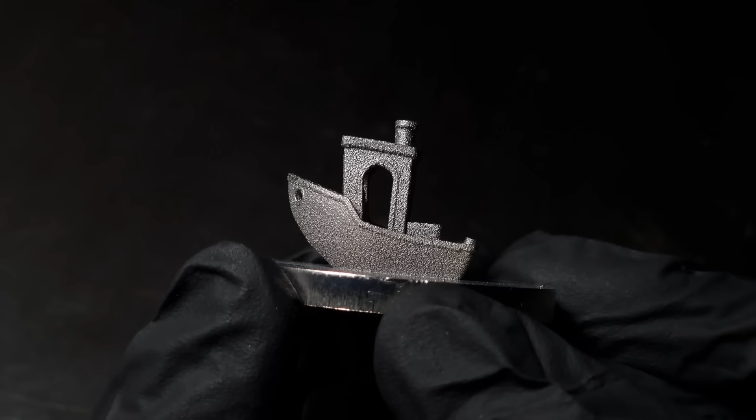Alright, in today's video I'm going to show you how I managed to print this benchy from stainless steel. I'm also going to show you how you can make your own welding camera and what parts are required. I'm going to explain how this contraption works. And finally, I'm going to explain where I've been for the last nearly 2 years.

Those of you who have been around long enough to know what this thing is may remember that I'd given up on laser powder bed fusion as a desktop metal 3D printer. And while it had yielded something, really it had fallen short. So over the next 12 months, I took another swing at things, and well, here's what became of it.

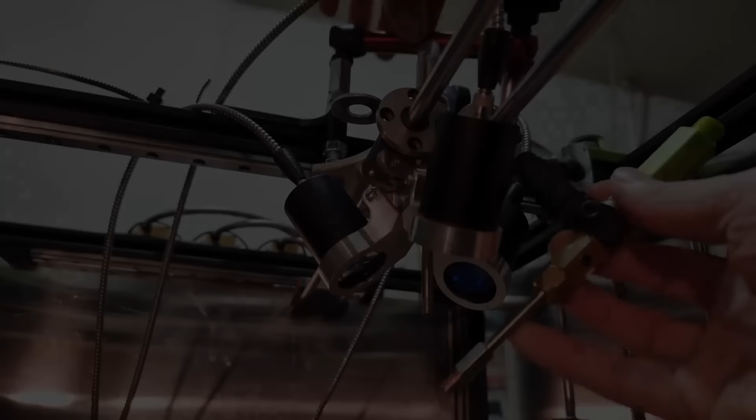So, I think to better understand the direction things took after the last video, we need to recognise the problem I was trying to solve. Without being able to feed the wire into the weld pool unimpeded by reflections, there was no chance of this succeeding. This was something the previous design struggled with, and as a result I spent many hours terminating fibres and untangling wires. On top of this, the beams didn't align nicely, the gas flow was unbalanced, and without being able to see the weld pool there wasn't much chance of a control loop. So I hit the drawing board.

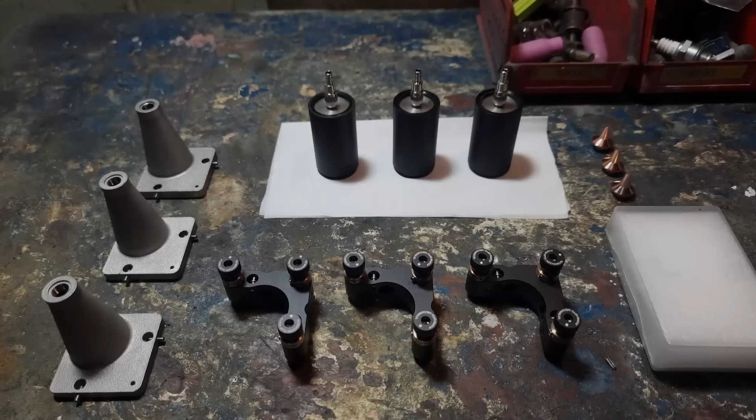The next iteration of design would play on the last, letting each beam bounce off the positive displacement created by the weld pool. To ensure that the beams were symmetric this time around, I repurposed 3 optical mounts, mating each of them to a lens host, which would also serve to direct the flow of gas. The hosts themselves were 3D printed from stainless steel, courtesy of JLC 3DP. Unfortunately, they don't offer aluminium as part of their printing service, and the geometry was a little too awkward for milling.

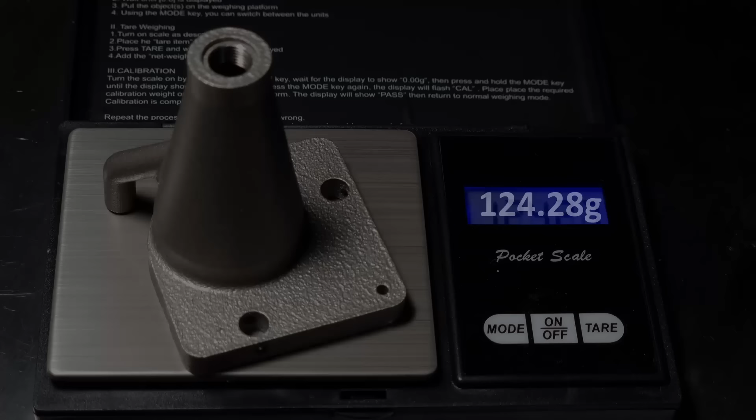Other than the threads needing to be tidied up, the dimensions were good and the surface finish was acceptable. Interestingly, JLC 3DP quoted the density of their 316 stainless steel as 7.8 grams per cubic centimetre, making one of the parts 100% dense and another 103% dense. I'll leave you to infer what's going on there.

The second major aspect of this design was to integrate closed-loop feedback. If I could achieve this, I would have a much better chance of avoiding the effects of stress and the potential need for simulation software. The only method I really deemed worthwhile was to exploit visual feedback, making an inference about the accumulation of heat based on the level of incandescent light and the size of the weld pool. With this information, I could map and dynamically adjust the energy input in real time.

There was one problem, however: welding cameras are expensive. So I would need to make my own. Fortunately, in principle they are pretty simple. It really just comes down to balancing the background lighting with the foreground. Given this is a laser welding process, it doesn't generate nearly as much light as its electric counterpart, with the exception of the laser itself, which can be handled with a short pass filter.

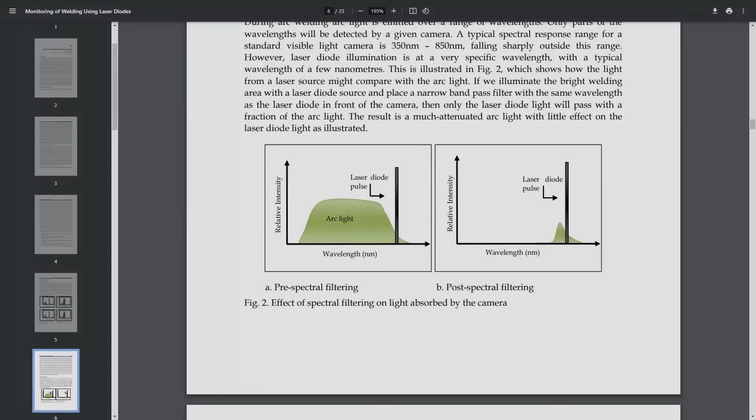Now I wish I could say that this was my plan from the beginning, but I went down a few roads before getting here. The first of which was informed by some older research which focused on the use of a narrowband filter alongside some pulsed laser diodes. This technique is better suited to electric arc processes as it emphasises broadband light rejection, but not knowing what else is possible, I still gave it a go.

My first attempt would be a swing and a miss, as I wanted to repurpose a smartphone. I had observed my old S9 doing pretty well in more demanding circumstances, so I was pretty confident I could achieve something. But I chose to sacrifice this S6 to begin with, just to see if the hardware would play ball. The overall plan was to remotely mount the camera and remove the battery, later upgrading the phone once I was more certain of things. Things would only go south from here as the phone kept boot looping, the camera was stuck at its maximum focal length, and then I would break the screen.

Meanwhile, I was working on building a pulse driver for a 50W 905nm diode. These are typically used in LiDAR applications, with some diodes reaching as high as 400 watts. Unfortunately, their wavelength was uncomfortably close to that of the lasers driving the welding process, making their performance very much dependent on the roll-off of the narrowband filters.

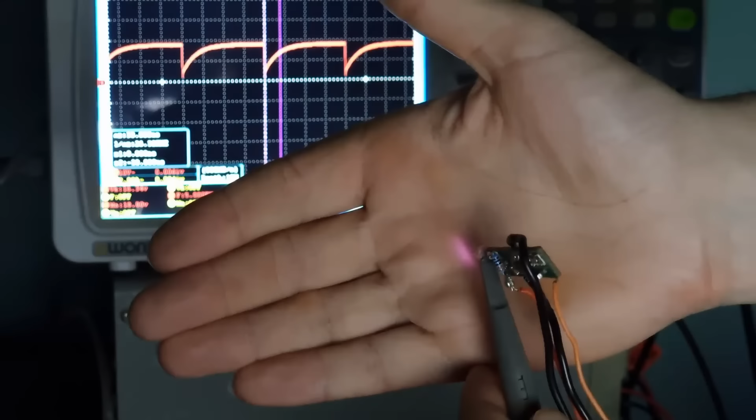Of course, the 2 narrowband filters I ordered arrived unmarked and had curiously similar performance, which didn't bode well as there should have been at least a 30% difference between the two. To make matters worse, I had ordered different diodes to those used in the research paper, and couldn't get anywhere near the fraction of power at 1 microsecond. Things were not going well.

About a month into this and having no camera or light source to show for it, I had to stop and reappraise things. For the sake of the camera, I opted to take a less intrusive approach, trading pixel density for practicality and making up for it where I could.

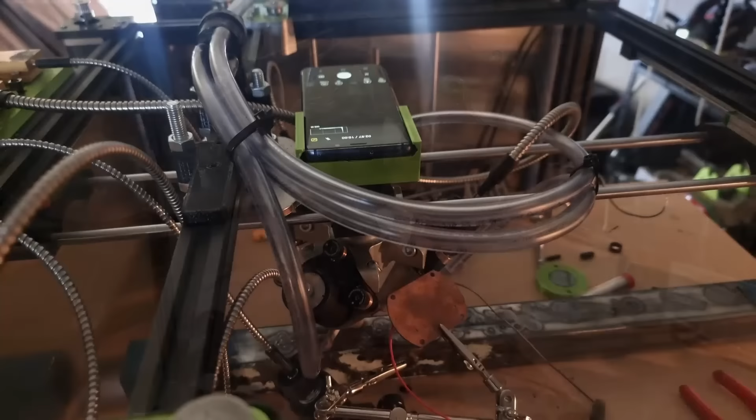I also toyed with a few ideas for a light source, the first of which involved adding another 915nm pump. But this was a bit expensive and didn't allow me to juxtapose the different wavelengths, and still left me with a monochromatic image. I also really wanted a colour image, as I knew this would make processing the stream a lot easier, so I kept experimenting.

I particularly wanted to try and avoid using broadly spaced laser wavelengths, so this COB LED rated at 5K lumens had its moment. I would adapt the same pulse circuit from before to overdrive the LED, but nothing really became of it, the intensity was still too low. I think some form of reflective light guide might have stood a chance, but using a lens was a mistake as the light was too dispersed, and the whole thing locked me into a weird configuration.

In the end, I would concede and try using a simple 450nm 5W diode, and this is where things would finally come together. I would opt for a pulse scheme here as well, as the head needed to go on a diet, and adding a heatsink definitely wouldn't have helped.

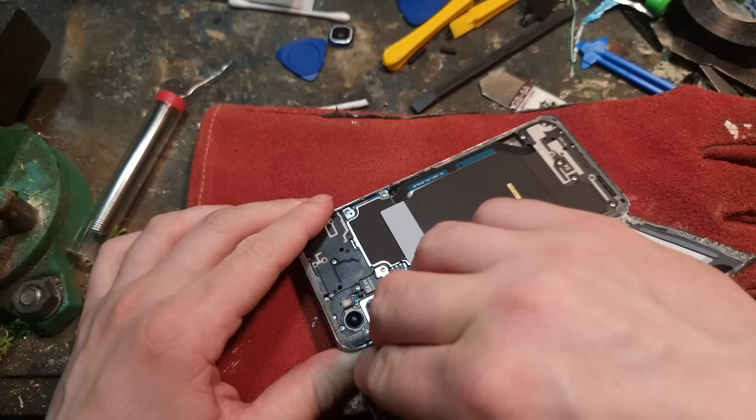So things would continue in this fashion for a while, with the phone eventually being upgraded to an S20. I really wanted to bring the camera in closer to help improve the resolution, but as the S20 came with various camera modules, I would end up with the wrong cables and just couldn't find what I needed. You can see the image had improved slightly, but it was still too grainy and prone to being blown out in the region of interest.

I just had to accept that without being able to mount the camera remotely, I wasn't going to get the image quality I wanted, and therefore would upgrade the camera to a standalone unit, this one claiming to have 78 decibels of dynamic range. Unfortunately, switching over to a standalone camera would call for a PC, adding anywhere between $500 to $1,000 based on second-hand components.

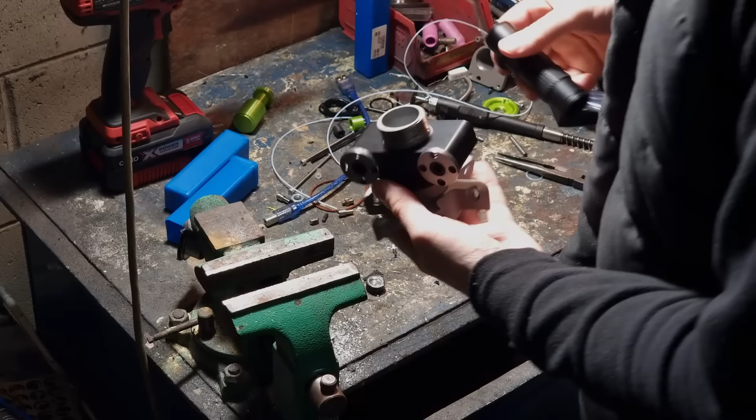Now that I had a new camera, this called for a new head, and now that I was paying for it, was made from aluminium. The camera was also paired with a 150x microscope, all very typical of PCB inspection hardware. I was also tired of having to manually synchronize the laser to the frame rate of the camera, and without wanting to add more bulk, decided to integrate a fiber.

This particular fiber is much too large at 600 micrometers, but being unsure of how tightly I could concentrate the beam, decided to play it safe. This would pretty much be the configuration I would run with for the remainder of my time working on this concept, with the beam switching between collimated and focused depending on what approach I was taking.

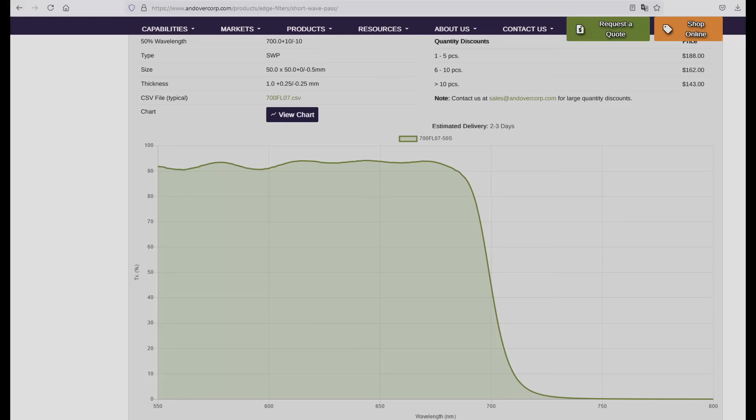To summarize, to build this welding camera you'll need a camera with a decent dynamic range and the ability to handle low light conditions. You'll also need neutral density filters in the order of 0.1 to 0.3%. I would recommend getting a few of a couple of orders of magnitude higher, just to allow for some adjustment. If you plan to record a laser welding process, then selecting a shortwave filter with a 3 decibel point at least 200 nanometers below the laser wavelength is ideal, more so if you want to factor out the laser completely.

For those more interested in recording an electric arc process, this particular camera seems to do okay without any light assistance. But for those wanting to replicate a more professional system, I've read that at least 200 to 300 watts of pulsed laser light is needed, synchronized to a camera with a global shutter, and outside of a peak within the emission spectra. I'll leave more information in the description.

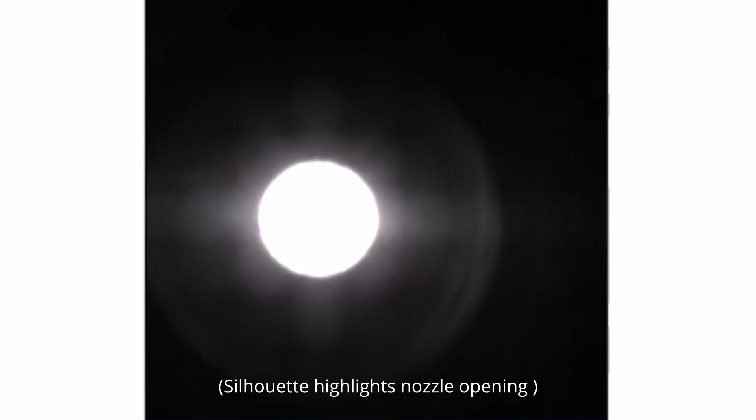Alright, so we need to rewind a little bit. To get the head set up, each collimator had to be adjusted to ensure each spot was focused as tightly as it could be. For this, I used a camera from Imaging Source along with their free software tool IC Measure, and when combined with a neutral density filter would allow me to see the image projected by the light source alongside the degree of light spill. You can see from a few of these images the imbalance in delivered light, and unfortunately the cause wasn't immediately apparent to me.

I'd assumed that at least one of the two lenses wasn't centered correctly, and despite repeatedly trying to realign the pair, would be forced to correct for it using whatever means I could. But later I would realise that the issue had nothing to do with the lenses and instead was caused by the SMA 905 adapter plates. Even though they are threaded, they often wouldn't sit flush despite appearing otherwise, owing to perhaps half a millimeter of play. So if you happen to notice scalpel blades hanging off this from time to time, yep.

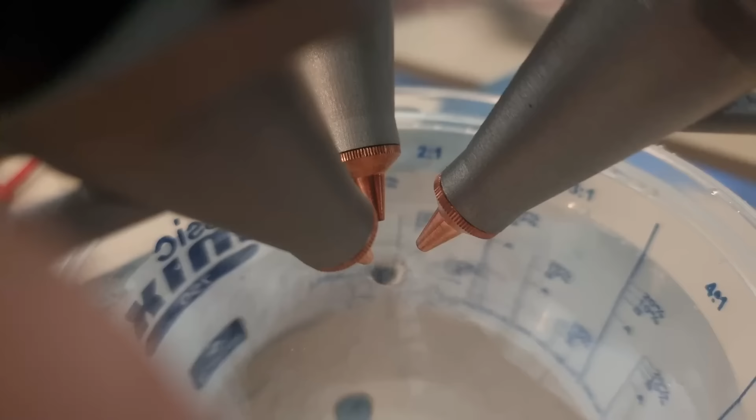With each lens housing aligned, they still needed to be aligned relative to each other, with each beam focused just outside their focal length and past the center point to cause the beams to deflect rather than reflect. Beyond the more mundane aspects of preparing the head for its initial runs, the first few tests really just sought to identify what was possible at a glance. With an overhead camera it seemed that this ruled out a coaxial feed, but I would try my hand at it anyway, using a J-type coupling.

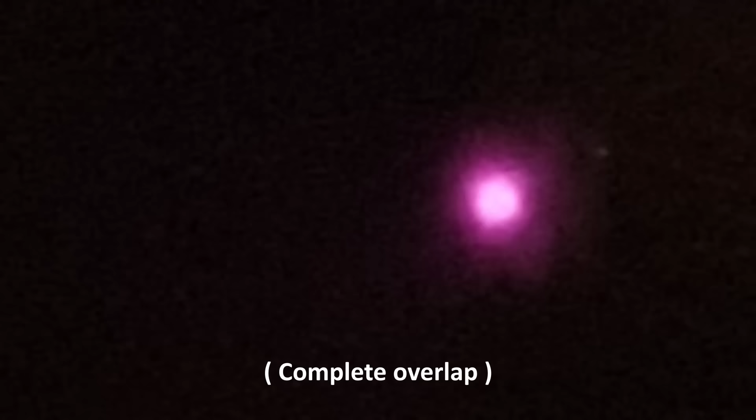I had reverted to using the smaller lasers from my previous attempt at this, as I really wanted to keep costs to a minimum. Unfortunately I found that I couldn't achieve much separation between the beams at this power level, and would have to resort to more familiar tactics. As a result, the results themselves were a mix, revealing that reflections were still very much a problem, setting the tone for the rest of my time working on this concept.

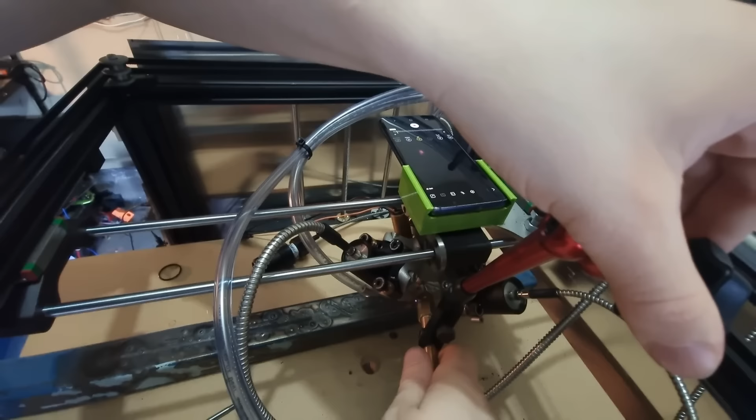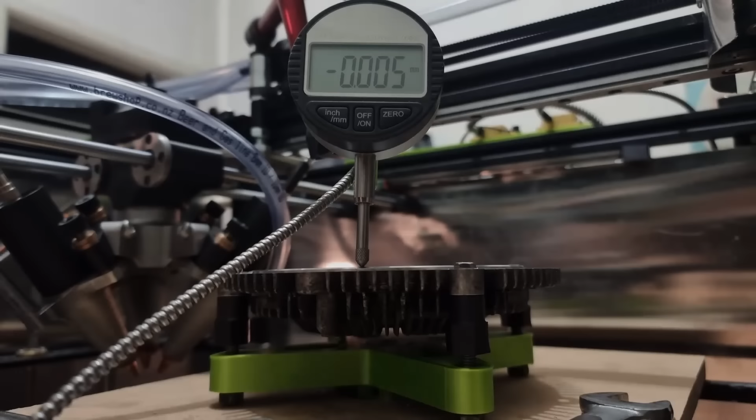As to what that plan entailed, it would simply be what had worked in the past, a two laser scheme which would see the wire being fed into the dead zone, but this time with the ability to maintain a consistent delivery. I had repurposed a viscous clutch taken from an Nissan TD27, with the substrates being cut to size and the plastic components acting as placeholders until the steel components arrived. If there was one thing that stood out to me, it was that leveling was going to be an ongoing nuisance, and heavily compounded by an unconstrained bed, but that just seemed par for the course.

Since I now had a rotating platform, I couldn't help but wonder what this process could achieve in an ideal scenario, that being an uninterrupted deposition relying on 2 lasers rather than 3. Now I did try 3 lasers momentarily, but without a coaxial feed that went about as expected. With 2 lasers however, the reflections were much easier to manage. After the obligatory printing of segments, checking that I could translate a Cartesian scale to a rotational one, I tried putting down a few rings to gain a better sense of the deposition height.

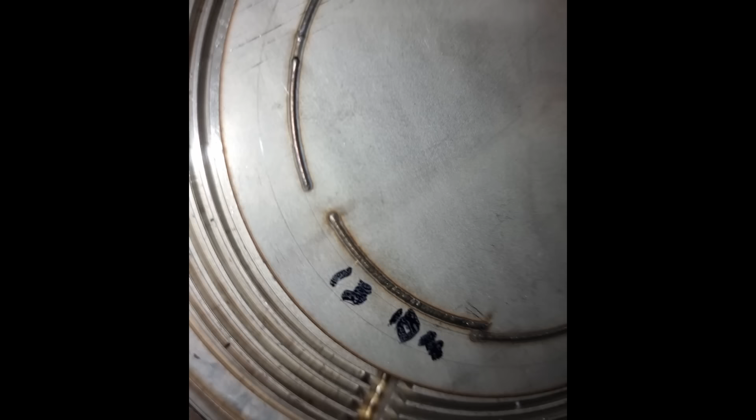The unfortunate thing about this design is that the layer height and respective track profile are influenced by the energy density, with the energy density itself being partially defined by the laser overlap and relative angle to the translation path, amongst other things. I would keep the beams partially overlapped to create a high point to aid beam deflection, and would also keep the wire fed at 45 degrees relative to the path of motion for the sake of simple geometric tests. But even so, this wasn't immune to reflections due to corners and other disruptions which would then build on themselves.

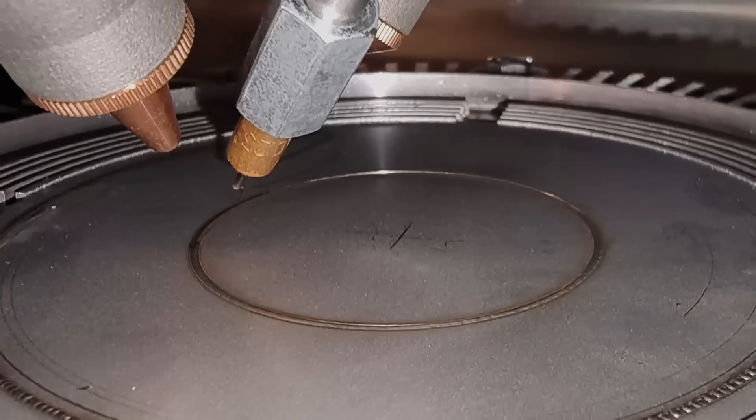Furthermore, if the platform wasn't exactly level, the degree of overlap would change and so too would the deposition height. But on average, with a level platform and a velocity of 10mm per second, a track width of 0.8mm and a wire feed rate of 22mm per second, this would yield a layer height of approximately 0.14mm. Naturally, what would follow would be several tests to see how the layers stacked up, and what you're looking at here is the result of 7 layers which should have amounted to nearly 1mm. Instead, the height was only 0.85mm and the source of it I wasn't too sure of.

It could have been that my layer height increments needed to change, or it could have been that the accumulation of heat was broadening the profile, creating a sagging effect. Either way, it wasn't good news. I was reluctant to start changing parameters at this point as I had already blown a couple of fibres, each time costing me a couple of days and several centimetres in fibre length.

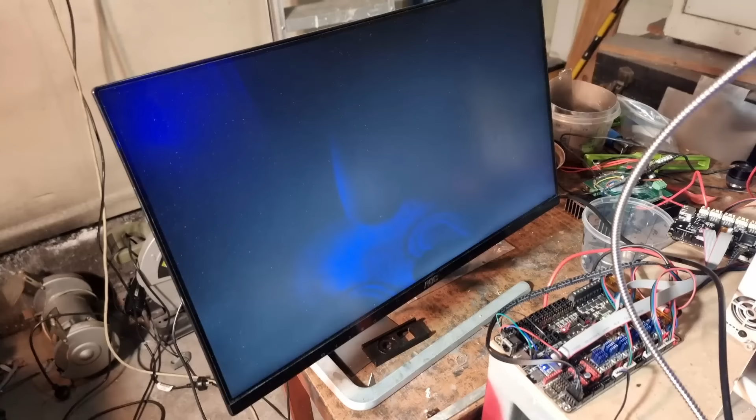So at this stage I started to focus on the camera to gain a clearer picture of what was happening. This is just an example, but you can see the effect of not having the layer height balanced with the feed rate, causing the focus to retract towards the beam waist. Although this example happened much later on, it's likely that the rings were subject to the same issue, but this was at least a month later and I'd begun to question the merit of a 4th axis, at least in this format.

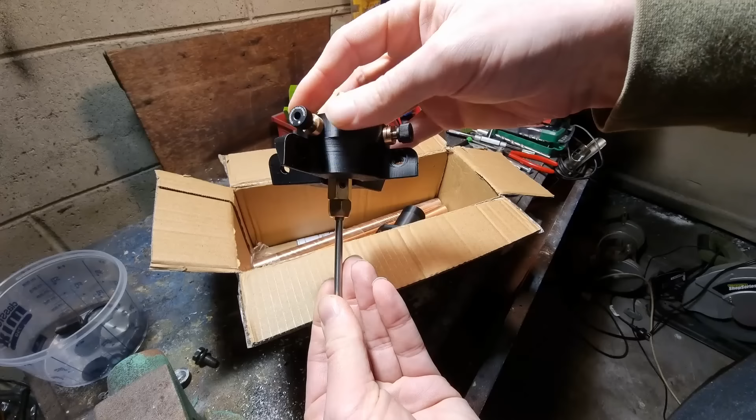I decided that I would try and simplify the design by reducing the laser count to 2, introducing a proper coaxial feed, and sacrificing the camera's overhead view if it enabled me to avoid complex path planning. This scheme would aim to keep the beams positioned 45 degrees away from the direction of motion, once again encouraging the reflections to bounce away based on a positive displacement. There were edge cases such as tight bends and 90-degree corners which had the potential to cause problems, but since I had now upgraded the lasers to 2 370-watt modules, I intended to control each module independently.

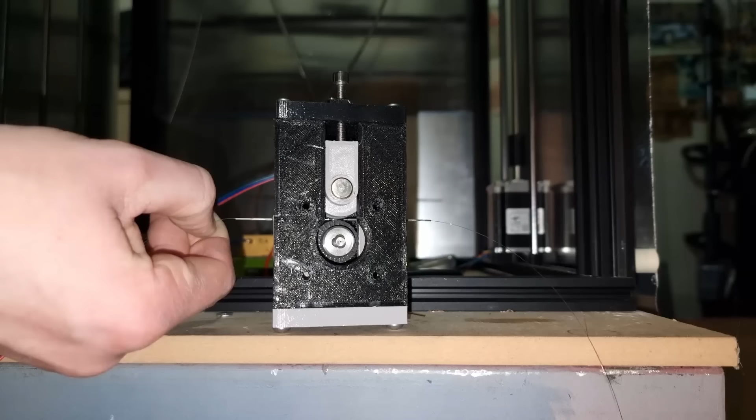The coaxial feed also made use of an XY stage as aligning the wire had proven to be exhausting, taking a disproportionate amount of time to get set up due to its delicate nature. Any slight bends upstream could also amount to a false alignment, leading to the wire missing its target and creating back pressure, creating a mess at the wire feeder. I wanted to solve this by reducing the distance between the outlet of the nozzle and the substrate.

Copper nozzles had worked okay so far as they reflect most light at 915 nanometers, but I couldn't find any with a fine enough bore and therefore would still have to sleeve them with syringes. Reflections would still see the feedstock bonding to the nozzle however, and to try and get around this I would use a fibre optic ferrule made from an inert material, in this case zirconia. Pure zirconia unfortunately undergoes a phase change at roughly 1200 degrees centigrade and is prone to cracking as a result.

I had to know if this would absorb or reflect laser light and to find out whether it could even handle the heat. The first thing I did was to expose it to the flame of a propane torch, and it did glow quite a lot, but never cracked. I also focused a laser on it, exposing it to the maximum power. It seemed fairly transparent to the beam, so I fed some wire through it and tested it again. And that did not go well. I figured I might be able to sleeve it with a copper syringe if I could find one, and tested it again while observing how the lasers interacted with the weld pool. That also did not go well.

In fact, from what I observed during these trials, I came to the conclusion that this whole concept might not be worth pursuing. Even though this run illustrates the weld pool with 3 beams applied, you can see how the reflections are heavily influenced by the flow of heat, leading the reflections to follow in the direction of motion. This really steers the process towards needing a higher volume of material to help keep the reflections away from the feedstock, and that was a compromise I was unwilling to make.

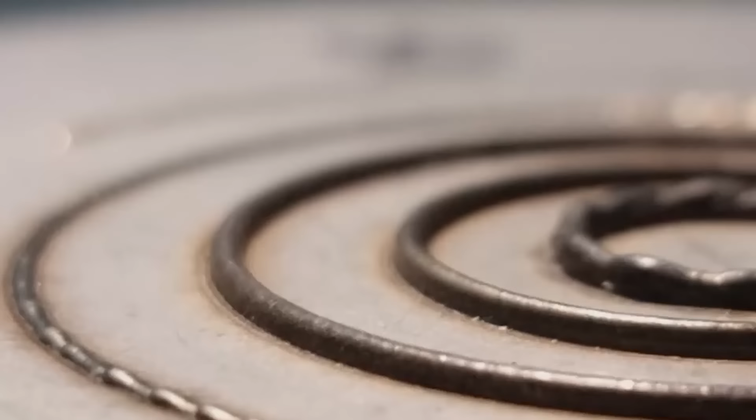To keep the print seamless, I had favoured a finer wire and therefore a lower volume of material, intended to be offset by a faster print speed. But this created a lot of issues as it was particularly susceptible to reflections, which meant initiating the weld was a delicate balance between too much or too little. By this stage, I was implementing a method to rapidly advance the wire when the continuity between itself and the substrate broke.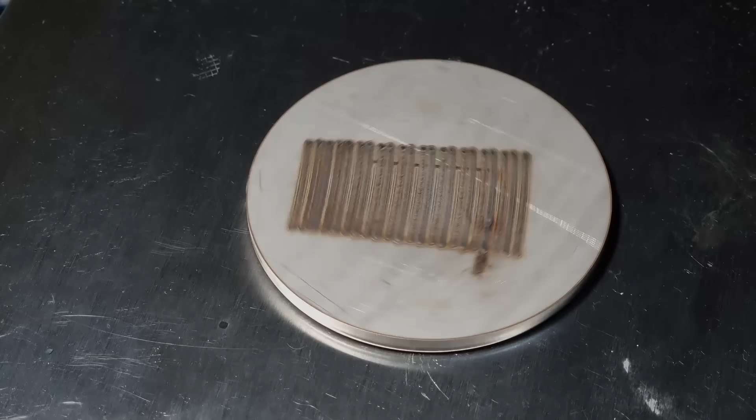But luck would strike again, and this time it was the final straw. I'd had enough. At this stage, the head still needed to be redesigned to integrate a wire feeder. The substrates were also warping due to stress, and I was spending most of my time repairing the machine, sometimes getting less than one run out of it.

I can't help but think that with the diode arrays, life was a lot simpler due to their ability to handle reflections, but the delicate nature of fibre-coupled diode pumps had really put me at odds with myself. They have the power, they have a small form factor, and are only getting cheaper, but at this scale and having to cater for all of the edge cases, I just don't think they're worth the time.

Alright, so that was a very much abbreviated version of events, but it was kind of necessary to help bridge the gap. So while I was struggling with that, I'd been thinking about what had shown promise in the past, and now that I'd given up on all things DED related, I decided to turn my attention back to SLM.

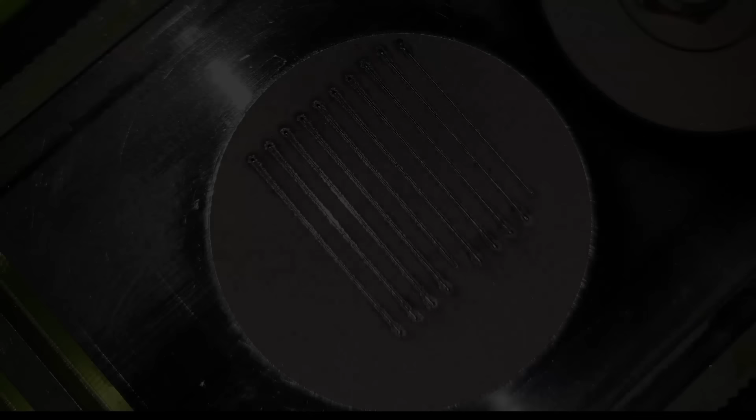So I guess the best place to start is where things left off, and this picture pretty much sums up why I gave up on laser powder bed fusion the first time around. I was under the impression that the vacancy in powder running alongside the deposited tracks was due to recoil pressure. This is a pretty well known phenomenon, often resulting in denudation, where the recoil pressure creates negative pressure on either side of the melt pool, drawing the surrounding powder through the plasma stream.

This appears to be a common enough problem in SLM, and as a couple of commenters suggested, a pressurized atmosphere seems to be the answer. But I really didn't like this, as this made the build substantially bigger, more complex and expensive. But I'd been thinking about it, and there was a major difference between mine and the more professional systems, and that was the power density.

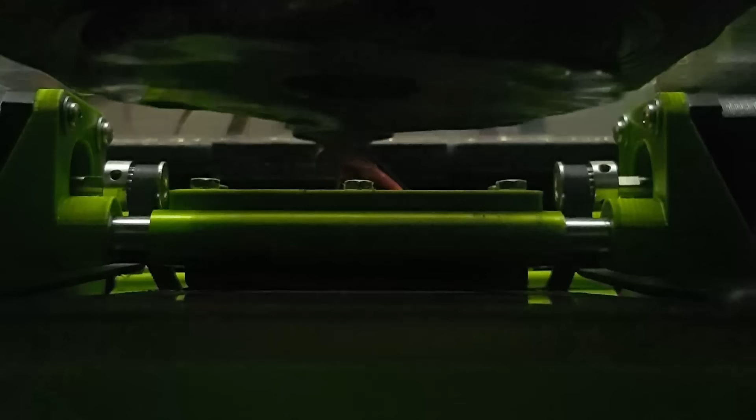With a spot size of 300 micrometers, I could achieve a theoretical power density of approximately 2900 watts per millimeter squared. Plenty enough to create a cohesive bead, but far from the threshold of keyholing, which begins at around 10,000 watts per millimeter squared. Since my efforts were operating well outside the window where there would be enough back pressure to create a cavity beneath the plasma, I was a little unsure of why I was seeing what I was seeing. At 300 micrometers, the spot size is anywhere between 14 to 36 times that of a professional system, so it didn't have the intensity, but it had the volume.

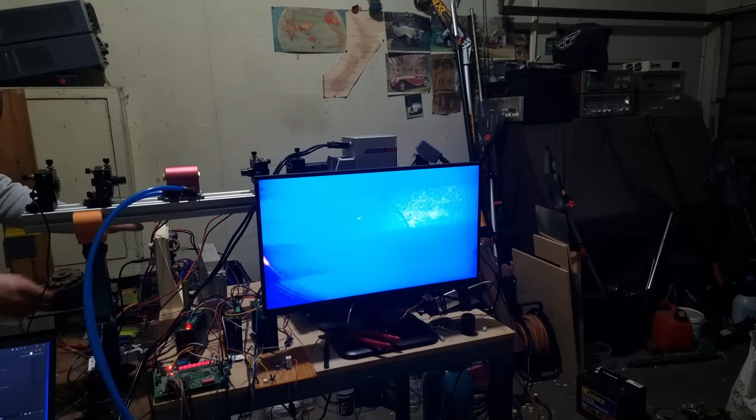Now, since I was using a diode pump, I had around 200 watts of power on tap, but what I lacked was the fidelity of a fibre or YAG laser, meaning that I couldn't focus the laser as tightly as many professional systems can, at least not without a large degree of stray light. So I'd figured that if I could bring the spot size down to 50 to 80 micrometers, with a similar power density, I could get away without a pressurized atmosphere. And it would turn out that I was right, but for the wrong reasons, but I'm going to explain why a little further down the track.

After how things had gone with the DED efforts, I wasn't super enthusiastic about starting from scratch. After all, this was just another theory. So I blew the dust off my old proof of concept and decided that this was going to be my starting point, but it needed a few upgrades first. Previously, I had just used a wood hole saw to provide a friction fit for the substrates, and this was fine as it wasn't under any serious thermal load and saw pretty limited use. But going forward, this wouldn't be the case, and I would replace it with, well, another hole saw.

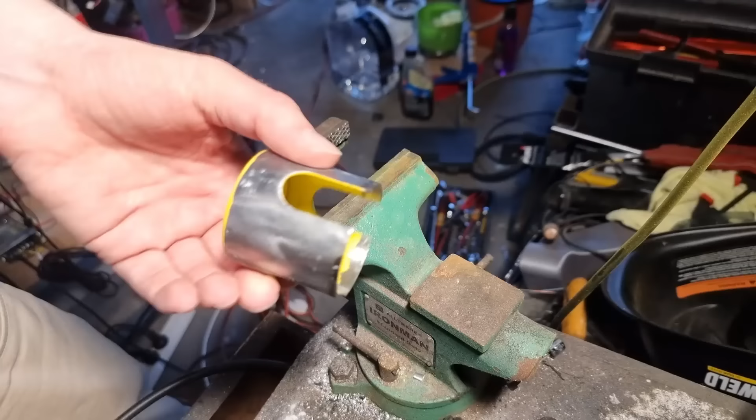This received a bit of a trim and a tidy up, along with some hacksmithing that would see it fit for purpose. But this in of itself wouldn't be enough to cope with the heat, and since it was surrounded by PLA, I needed to get rid of as much heat as I possibly could. So I fashioned up a little water-cooled heatsink made from a herb grinder, drilling a couple of holes for some barb fittings and bringing it all together with some 2-part epoxy.

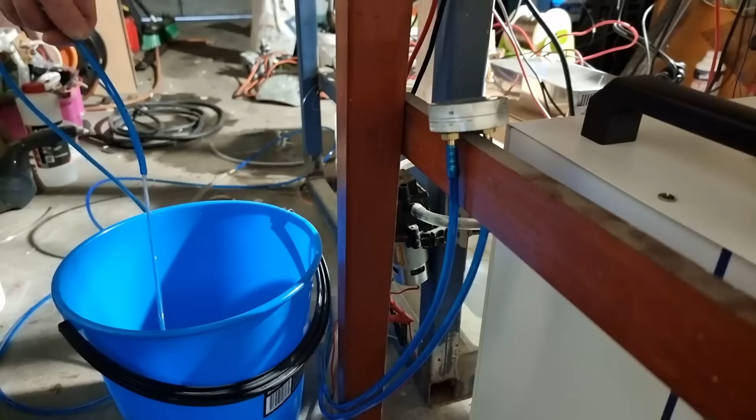I wasn't 100% convinced that this would be watertight, or whether the epoxy would even tolerate the prolonged exposure to water, but it seemed to hold up and has done so ever since. With everything pieced together, I would tactfully modify the powder bed to accept some water lines, along with the wiring for the thermocouples.

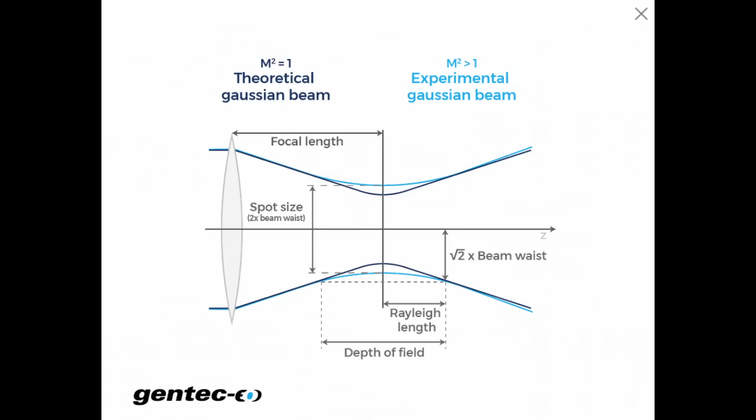Aside from these changes, the powder bed remained largely unchanged from my previous video on it. The biggest change, however, was the laser, and although I settled for this Nd:YAG arrangement, it wasn't my first choice. Ideally, I would have liked to have used a 50-watt ytterbium-based laser, as these end-pump systems offer much better M-squared values. This basically translates to how closely the beam resembles a Gaussian profile, and in turn how tightly it can be focused. The closer to one, the better.

The major feature that pushed me away from these, however, is the integrated Q switch. This is a great feature for allowing the laser to achieve much higher peak intensities, which is perfect for ablating metals. But in the context of fusing metal powders together, depending on the characteristics of the powder itself, my impression was that this would vaporize the powder to be formed into a solid, and potentially disrupt the surrounding powder.

There may be a solution to this, which is to simply unplug the Q switch, perhaps needing a dummy load to fool the electronics. But I was unsure of how the device would actually respond and conscious that it might just result in some expensive magic smoke, so I went for an alternative.

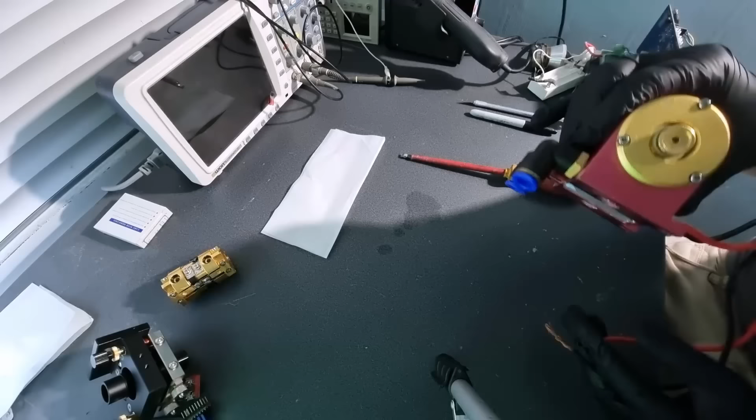These side-pumped Nd:YAG lasers are a much older design compared to their fibre counterparts, but were once the upmarket tool for laser engraving. In fact, these are so old it was difficult to find any pictures of them in their natural habitat, almost as if they predate the internet. There is one company, however, with a befitting website still dealing with them. I'll leave you to guess what era they're from. They are still in production today and can be found secondhand on eBay or brand new on AliExpress, but beware that they are often sold secondhand for a reason, as I would find out.

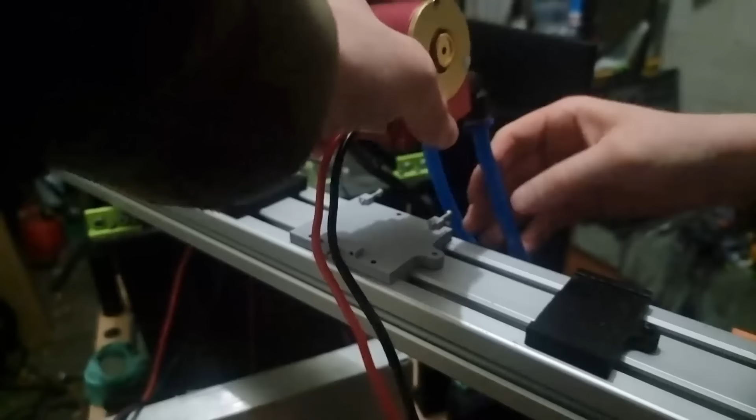Much like the illustrations, the information available to the budding practitioner is pretty thin on the ground, leaving a rookie like myself to get tangled up in the theory chasing nanometers where millimeters will suffice. For those looking to cut their teeth, Leybold released a really good primer in the late 90s to go alongside their educational kit, explaining the general theory of the operating principles.

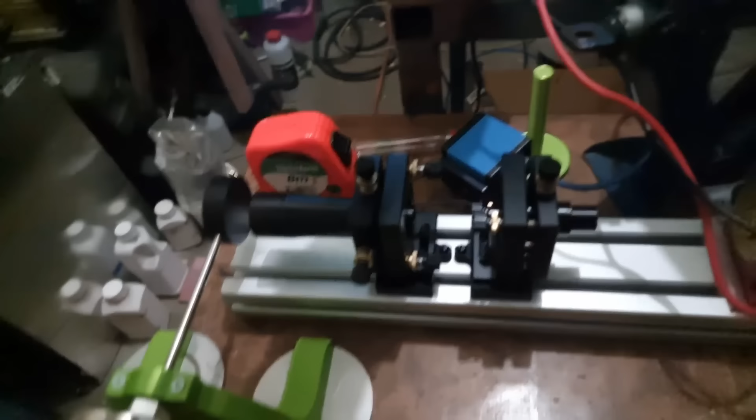I would use this as the basis for my first configuration, but quickly discovered the limitations of the cheaper mirrors I had bought, damaging the mirrors at around 20 watts. The original mirror mounts I purchased came with a set of mirrors from a factory system, but unfortunately I had no idea of their specs. Even now I can only speculate based on what I have read, but suspect that the flat plane mirror is an 80-20 split, and the HR mirror has a radius of curvature somewhere between 1 to 2 meters. Gleaning information from sellers, it seems like 400mm is the typical cavity length, and switching over to new mirrors would bring the power up to just shy of 40 watts.

The particular pump I'm using is a GTPC-75S, which as you may have guessed is rated at 75 watts, but this is rated at a rather awkward 29 amps whereas I could only provide 24, the max an RD series buck converter can supply. Even so, this should still produce 62 watts, but with the unit plateauing at 38 watts it was evident that there was something wrong. The power meter I would use to dial in the laser is just a cheaper unit, but it gives real-time feedback which is nice to have while making subtle adjustments to the mirrors.

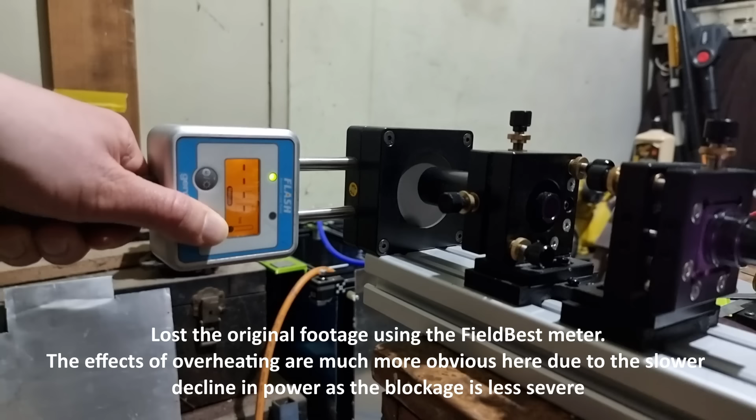As I would power the laser up, I would see a brief spike to around 50 watts, with the power settling to below 40 watts. Unsure of whether it was just the meter stabilising or whether it was the power rolling back due to overheating, my initial suspicion was that there was a blockage within the pump, and I would test the flow, finding it to be above average. I would then spend more time than I would like to admit second-guessing myself, wondering how selective I actually needed to be with the alignment.

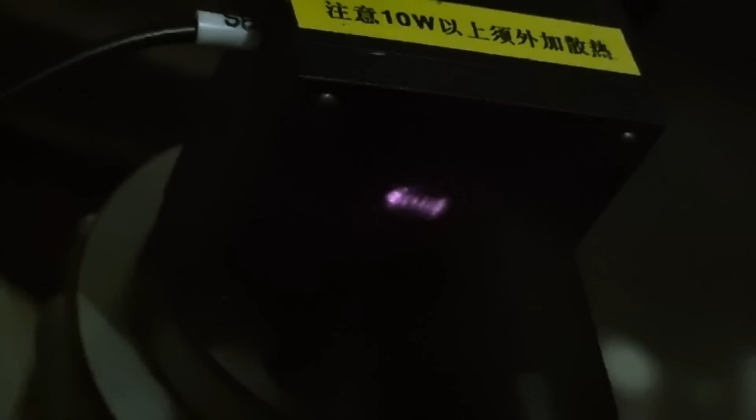Until eventually I would tear down the pump and sure enough there would be 2 blockages, but fortunately no dead diodes. With everything reassembled I could now pull 58 watts from it, which I was happy with, but there was still the issue of transverse modes.

Since this is a side pump laser, the gain medium is much shorter than that of a fibre laser, and to achieve the same order of power requires a much larger cross section. This unfortunately increases the possibility of resonant modes on axes other than the optical axis, meaning that the output beam is composed of a series of rays rather than a single fundamental mode. This results in a multimodal beam, lessening its ability to form a tight focus, leaving the spot size compromised, which of course lowers the power density, print speed, and increases the feature size.

I would measure the m² value at 3.91, a slight improvement on that mentioned in Leon's size paper. However, the spot size I would measure would be near 100 micrometers at 27% of its rated power, and would peak at 140 to 150 micrometers above 34%, suggesting that the m² value was actually higher. Since the refractive index of the gain medium changes with temperature, this could be due to the cavity being optimized at too low a power, but was likely the result of many things, from the cavity not being aligned well enough to the choice of mirrors in relation to the cavity length.

Despite this, the figures quoted in Leon's size paper suggested it was performing reasonably well for a system without a mode selection element, and I would have to cut my losses here as I had invested quite a bit of time to get to this point. But at least now it could achieve a power density on par with the previously used diode pump, and open the door to using galvanometers. Operating at a more conventional wavelength with a better quality beam meant that I could avoid the hassle of supporting an XY stage, brought about by the poor structural support of a plastic container.

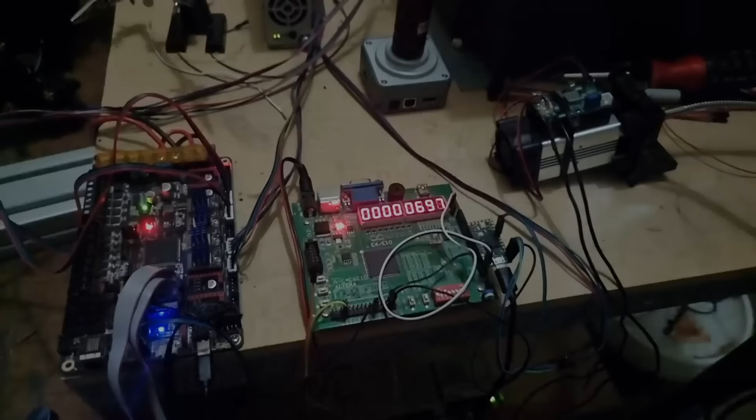The scan head I decided to use is the RC1001, probably the cheapest out there at around $170 to $220. This makes use of an f-theta lens to provide a flat focusing field with a linear scan angle, bringing the total up to around $280. To drive the scan head, I used an open source library called Opal, listed with warnings, making use of a Teensy 4.0. This converts a serial input stream into the XY2-100 protocol, bit banging values across the ports to support a 2 MHz clock rate. I ended up modifying it so that I could facilitate the basic features of the printer, controlling the power supplies, fan controller, and providing closed-loop feedback for the build piston.

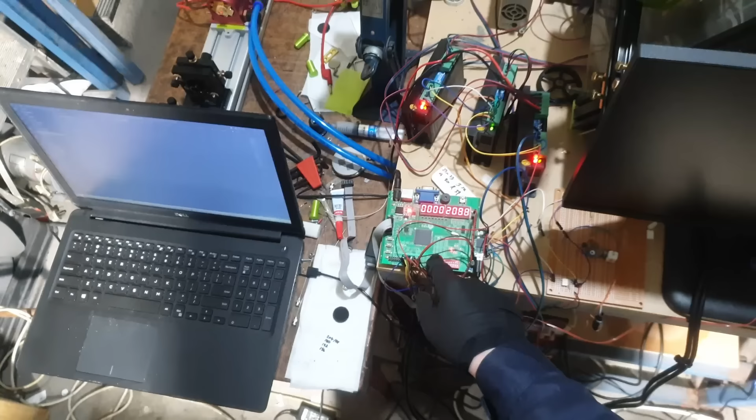I originally implemented a motion controller alongside a quadrature encoder on an FPGA, with the intention of migrating the rest of the features across in time. But I quickly discovered that the water chiller I had purchased has a hidden feature, delivering multi-amp spikes which would end up damaging the FPGA. I suspect a lot of this has to do with the lack of buffering on the FPGA dev board and my chaotic wiring scheme. But even with the chiller placed further away, it wouldn't play nice and had to be put in the corner for timeout. In the end, practically all of the low-level tasks were carried out on the Teensy, with the FPGA hanging around as an interface for manual control and as a digital readout for the linear encoder.

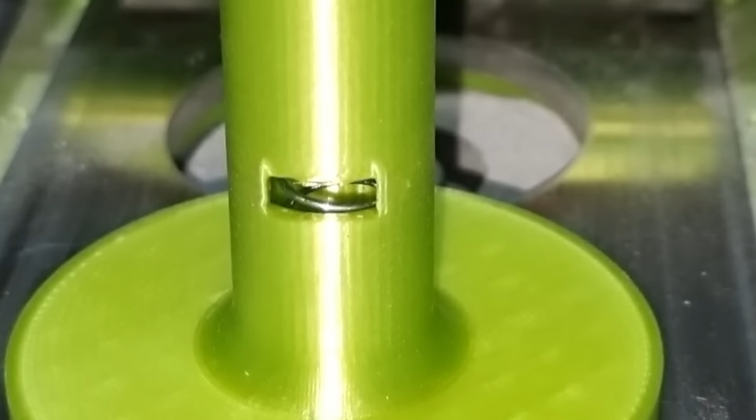Moving forward, one of the first stumbling blocks in getting this off the ground involves setting the correct distance between the f-theta lens and the powder bed. Because I wasn't using an established control card, I couldn't simply reference the size of a projected image, and therefore made a tool which would sit flush with the powder bed. I didn't really have much luck with this, and I suspect this came down to several factors, the flimsy nature of the plastic container and my inability to load it correctly while adjusting the height being at the fore of them. I also tried projecting an image down onto the powder bed, but this didn't yield the result I was looking for either, potentially for the same reasons as before and the differences in wavelength.

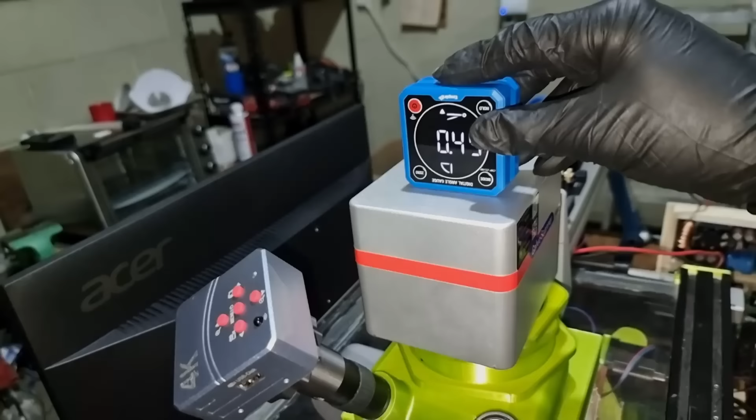In fact, it would be a slightly more unorthodox method which involved using a thin piece of graphite, adjusting the height of the build piston until the surface began to oxidize, making corrections based on the difference, and dialing the power down as far as it could go to ensure the spacing was optimal. Other than ensuring that the powder bed and the galvanometer were in reasonable alignment, using whatever means I could, the next step was the inescapable printing of metal tracks.

At this point, I'd already taken a couple of swings at it, but these all concerned the aforementioned problems. Going ahead, the next run would deliver more bad news, but this is where I started to uncover where things had gone wrong the first time around.

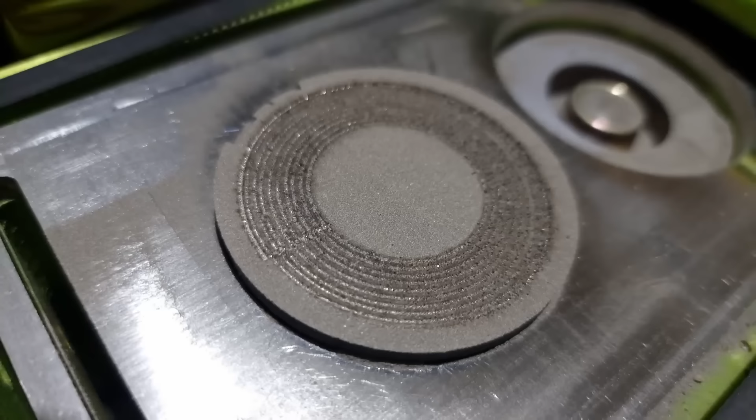And as for what had gone wrong, I had applied far too much powder for my first layer. And as to why, if memory serves me correctly, I'd had a lot of trouble trying to get the powder to cleave effectively, even going to the length of sanding the substrate to stop the powder from sliding over it. Eventually I just accepted that the first layer would be higher than the following layers, turning the laser up to 11 and calling it done.

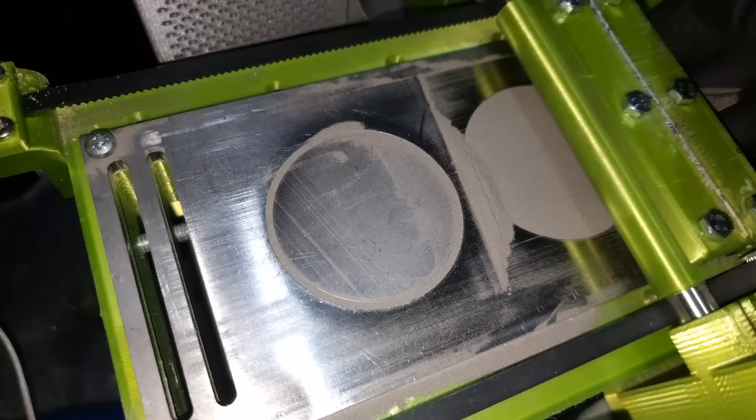But unwittingly, I'd already solved this issue with the use of a plastic swipe card, but not until I found myself constrained for power would I have to reconsider this. So with the first powder layer now semi-transparent, I could produce cohesive tracks up to around 200mm per second, and noticeably without the vacancy in powder running alongside the deposited material. I had my guesses about why this was, but didn't feel that my theory regarding volume explained it, as the vacancy was wider than the track itself, but the answer would be revealed to me in time.

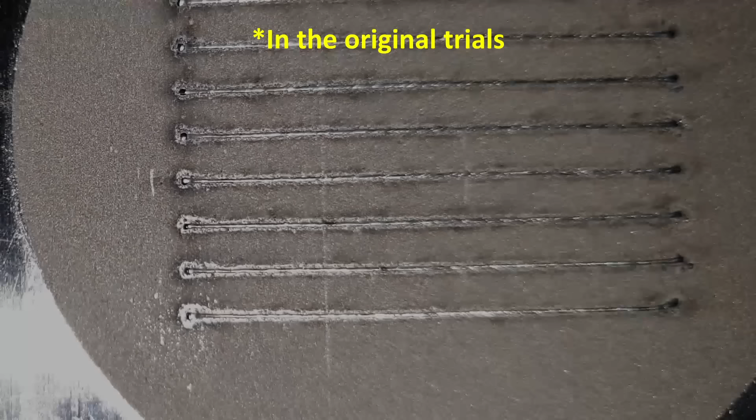My next move was to embark on the second dimension, taking the print speeds that had yielded nicely formed tracks and testing them against the different hatch spacings. I began with a series of tests with hatch spacings ranging from 25 to 150 micrometers, all conducted at a conservative 90mm per second and just following a typical zigzag pattern. At hatch spacings of 150 to 100 micrometers, the irregularities were pretty apparent, but not unexpected. They did help identify the effect of powder disturbance in comparison to the individual tracks though.

At 25 micrometers, the irregularities remained but in a different format, seeming to embed the spatter from the previously processed tracks. I decided to push ahead and start stacking layers as the consequences of each spacing wouldn't really be known until given a chance to materialize. I only managed around half a dozen layers as the build piston would break free, but still managed to observe the settling of each scan pattern.

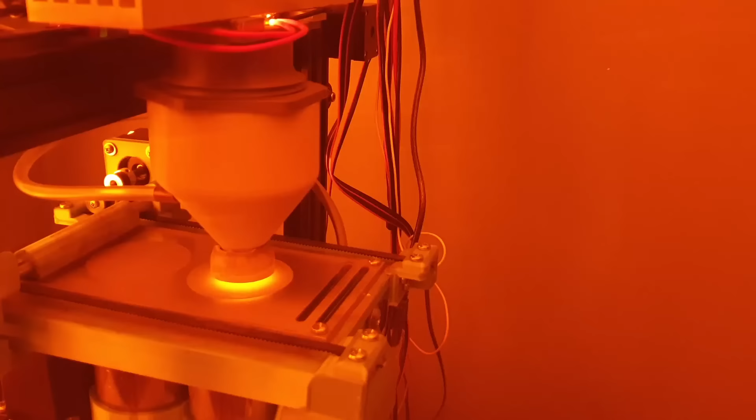Something else that was apparent was the formation of raised edges. I'd encountered these long ago, but at the time suspected they were due to excessive heat from a limited processing speed. I needed to find a way around this, as this would disrupt the print sequence as it had done in the past.

Part of the appeal of switching over to galvanometers is the ability to experiment with different scan patterns, and something I had wanted to observe was the effect of multipass scanning. I already knew from driving the process at 90mm per second I was expending far too much energy, causing an excessive droplet size. I had hoped that by driving the process at a much faster speed, I could iteratively sinter the metal until it had completely fused, avoiding the creation of spatter. What I discovered was that the process speed I had arbitrarily chosen was too fast, and instead blew the majority of powder out of the area to be sintered.

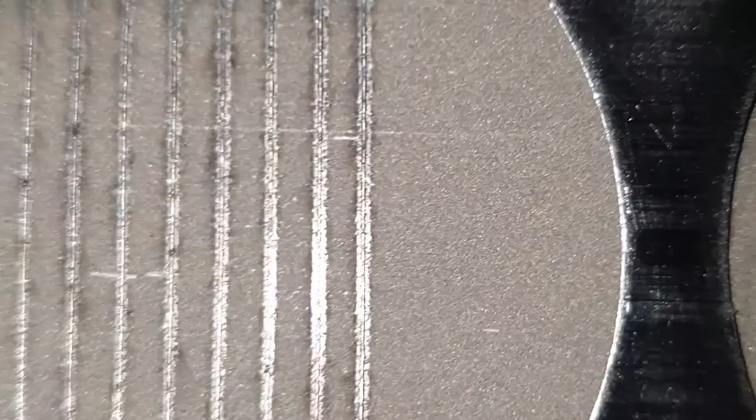Even though it was a failure, it came along with a couple of revelations. The first was that the existence of the walls proved that the processing speeds of the adjoining segments were different to what I had programmed, bound by the processing capacity of the software. The second revelation relates to the very issue I mentioned in the beginning. The causation of the vacancy of powder running alongside the tracks likely had less to do with denudation and more to do with a poorly focused beam.

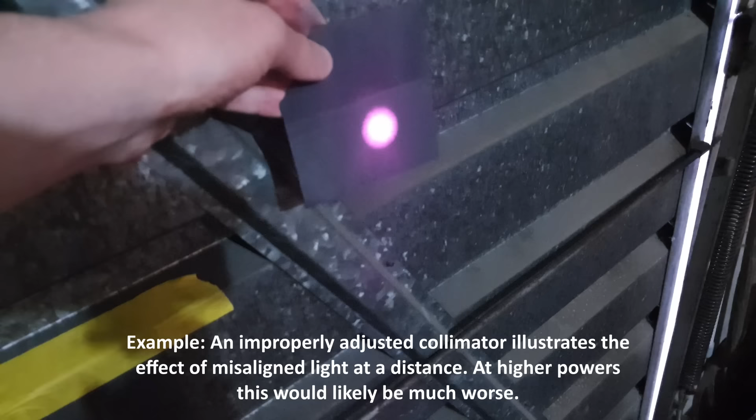I suspect there was a high enough degree of stray light which led to the adjacent powder being heated enough to cause the surrounding gas to rapidly expand, blowing the powder away and through the plasma stream. Since the power was significantly higher to adapt to a thicker first layer, this likely worsened the effect, and without the tools to effectively measure the degree of stray light, it totally escaped me. I think denudation still plays a role in this, but to what extent I'm not sure.

I would like to think that if I revisited that approach, I would come out better off second time around. After witnessing the creation of the edges from the adjoining segments, I decided that I'd rework the post-processing script so they would no longer exist. I also modified the script so that it would only generate a unidirectional scan pattern, simply to avoid horseshoeing, attempting to generate a more uniform heating strategy. Areas where the path for heat would be constrained would still suffer, but that was in the too hard basket for now.

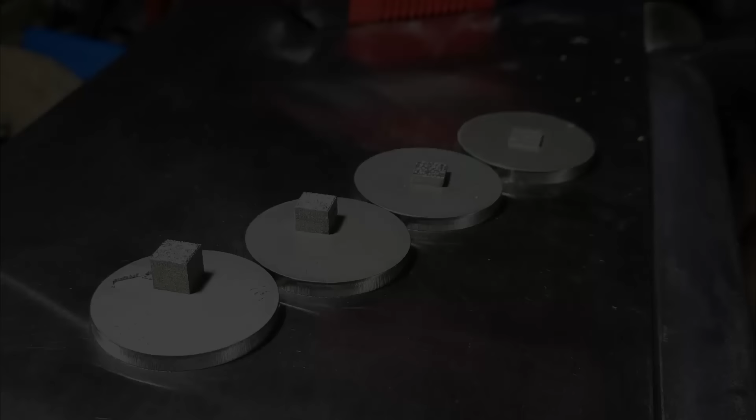The first cube took around 4 attempts before I actually succeeded, mainly owing to the issues I mentioned previously involving the water chiller interfering with the FPGA. It wasn't much to look at and there was a clear amount of porosity, but it was a milestone complete.

I also tried printing some overhangs using the same parameters to figure out what the limitations of this setup were, and as you can see, I was still battling with the system crashing multiple times per run. It seemed happy at 50 degrees away from the build plate, but at 40 and especially 30 degrees, it was reaching its limits.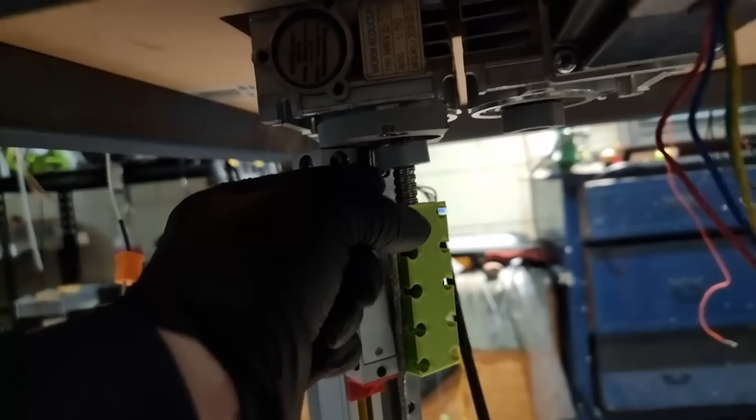I was also witnessing my powder bed begin to break apart as using a hammer to level the substrate had taken its toll. I would persist with it for a little while as initially it wasn't too bad, and it would be a nasty job to deal with while I was already busy playing whack-a-mole with the other gremlins. I would come back to it later though.

The plastic edge of the recoater blade was also suffering as the printed surfaces were eating away at it during every pass. This design would hang around for a bit longer than I would have liked, but was easy enough to replace even if it did slightly compromise the layer height. Problems aside, I set up another run to see if I could improve the surface finish.

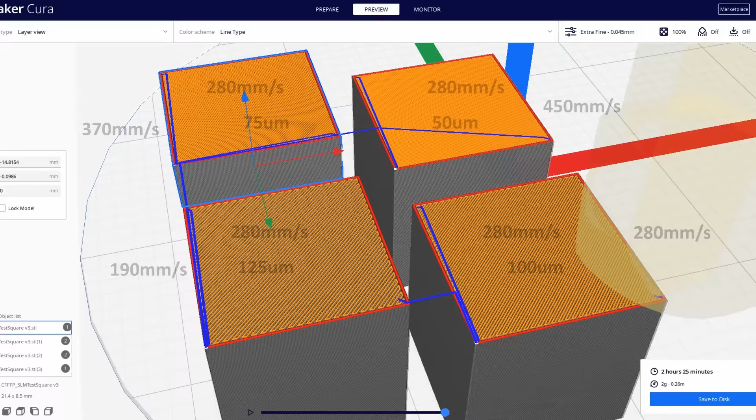For this run I performed 4 tests with wall speeds of 190, 280, 370 and 450mm per second, a fixed infill speed of 280mm per second, and various hatch spacings ranging from 50 to 125 micrometers. I also increased the inset of the infill from 0 to 50 micrometers, just to ensure no overlap would contribute to raised walls.

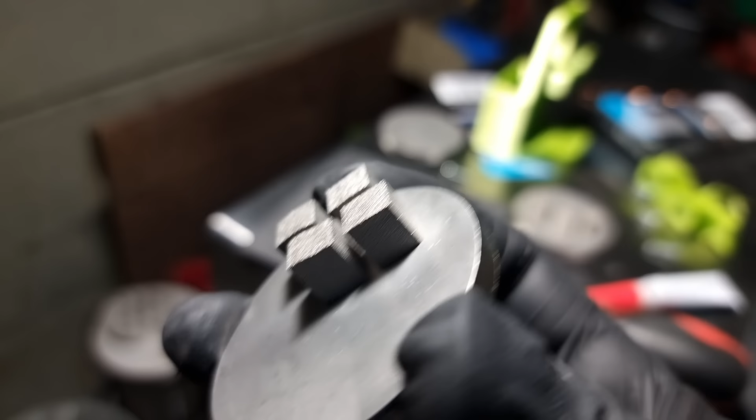It's pretty clear that of the 4 cubes, the surface finish was the best on the cube that was printed with the fastest walls and the shortest hatch spacing, with the appearance gradually degrading at slower speeds and broader spacings. You'll notice that 2 of the cubes are partially detached, and this was simply because I didn't repair the damaged recoater blade, and instead tried to position the cubes to avoid the damaged section. For a first attempt at improving the appearance, I was pretty happy with it. Unfortunately, the success would be short-lived.

I followed this up with a few more tests, mainly driven by the curiosity of what faster speeds could yield. The next run would consist of 5 cubes ranging from 400 to 800mm per second, with wall speeds the same and a hatch spacing of 75 micrometers. Before I could get them in front of a sandblaster, immediately it was apparent that a lack of fusion would see these settings as not much more than a candidate for support material. And with my very formal method of testing, not one of them would survive.

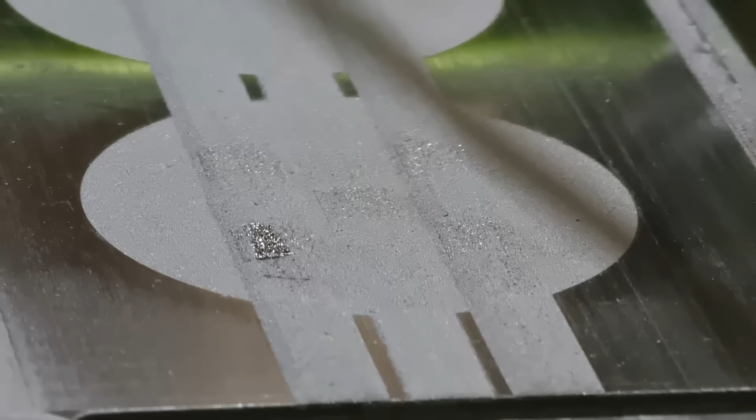I tried again, but this time performed a multi-pass scan attempting to eliminate most of the spatter by performing a sintering step followed by a melting step. Watching the footage I couldn't see much in the way of spatter, which was a win, but it appeared that the unevenness still remained. The additional heat from the multi-pass approach was also having an adverse effect on the recoater blade, particularly for the cubes aligned in a row, hence why they are shaped like loaves of bread. This would no doubt compromise the results, but at least one of them managed to survive me wrenching on it.

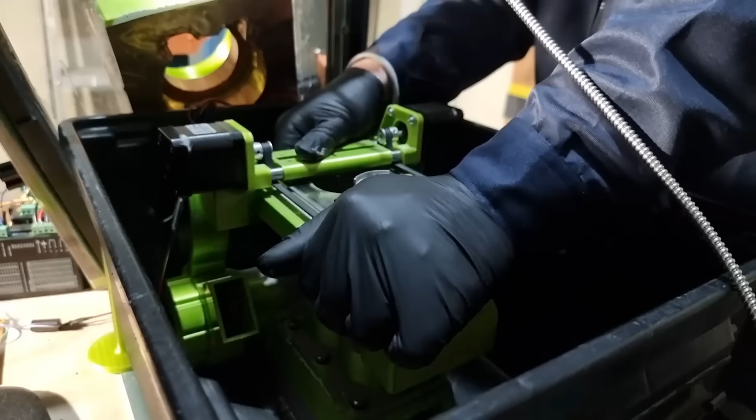Again, another series of tests, but this time at much more conservative speeds. These would result in stunted cubes after running short on powder. They did yield much better strength, but as you can see they are rather crooked due to the powder bed failing. I had to stop and address this before going any further, as this was no doubt impacting the focus of the laser, along with the geometry of the test prints.

I had originally designed the powder bed with the intention of using very simple materials, keeping the price of the powder bed down to a few $100s. Where I'd gone wrong is using general purpose glue, which didn't take kindly to being hammered upon. It just so happened that the 2-part epoxy I use for bonding fibres also happens to bond metal to plastic, and supposedly is apt at dealing with impacts.

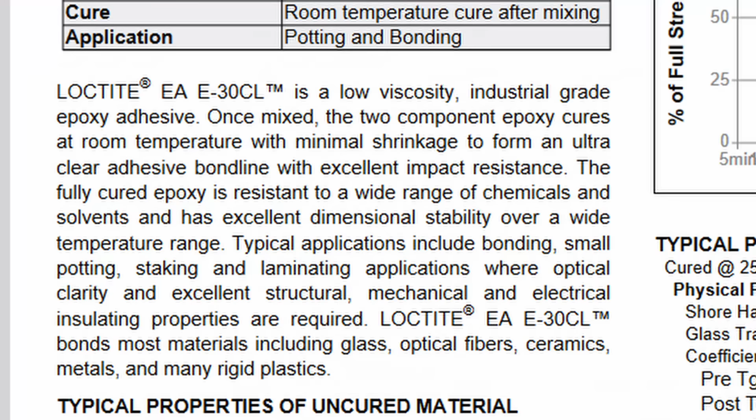I'd make an effort to scuff up the edges a little better the second time around, and after a generous application of glue, would have everything reassembled and ready for the next problem.

Before we continue on, I think it might be worth making an aside here, because if you think I've been freewheeling numbers, you'd be right. Well, actually that's not quite the truth. There is a fairly simple concept called volumetric laser energy density, which is used as an index for performance. It's said to influence everything from surface finish to microstructure, and the formula is composed of the applied power, scan speed, hatch spacing, and layer thickness, giving the applied energy per unit volume.

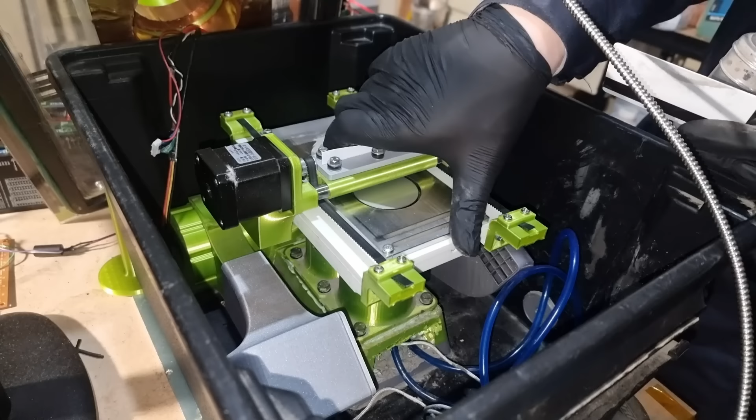The problem is these numbers can vary wildly depending on the system itself, as the applied energy is not the same as the amount absorbed, and that can be influenced by factors such as spot size and the behaviour of the melt pool. For 316 stainless steel, the numbers are commonly in the band of 50 to 80 joules per millimetre cubed, but this is assuming that the processing conditions are on par with that of a commercial machine. As I can't concentrate my laser as well, things would stray towards the experimental, and with that we continue forward.

The next few runs would focus on dialing in the settings, as a lack of fusion was still undermining part strength. The most obvious answer to this was to increase the input energy, and seeking to minimise the potential for spatter, I would do so by reducing the hatch spacing. I dropped the hatch spacing down to 50 micrometers and started to search for a print speed that would grant me enough part strength without compromising too much elsewhere.

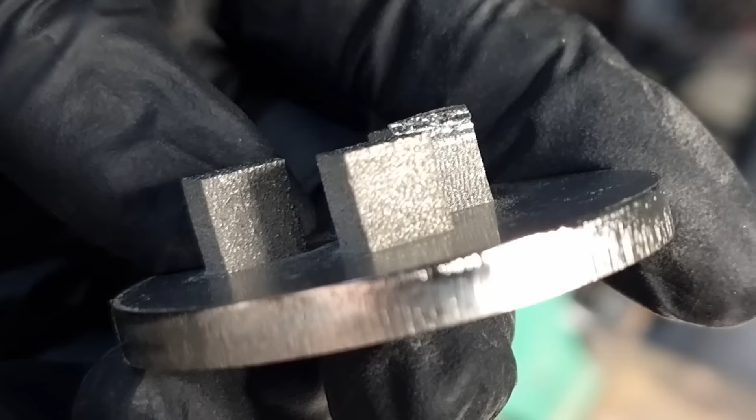This test yielded some okayish results, only just surviving me swinging on it, but it was apparent that it hadn't fully fused. The following test saw the speeds drop down to 120, 140 and 160 mm per second, and these cubes definitely showed signs of improvement, but you can still see the metal is softer than it ought to be, and I would confirm this using a hole punch. The reason for this is that the part density was only 78%, and despite trying to improve it would never surpass 84%. This is an area I am still working on and suspect there may be a few contributing factors. It won't be until the next video that I really address it though.

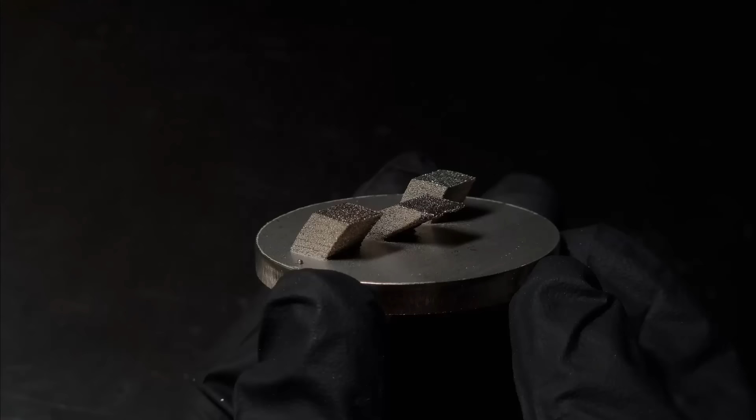Some other peculiarities would manifest as the prints would reveal themselves to be sensitive to orientation. I initially thought this may have something to do with airflow, but this didn't really make sense, as the height of the pinched edges was too consistent. The actual source of it would simply come down to the angular edges having an increased cutting effect on the recoater blade. I ended up replacing it with a rounded edge made from a harder wearing material, that being PTFE tubing. Unfortunately, I only had a smaller size on hand, but it would still address the problem whilst also slightly improving the part density. I also tried reprinting the overhangs, and these yielded pretty much the same results, but with far less interference from process failure.

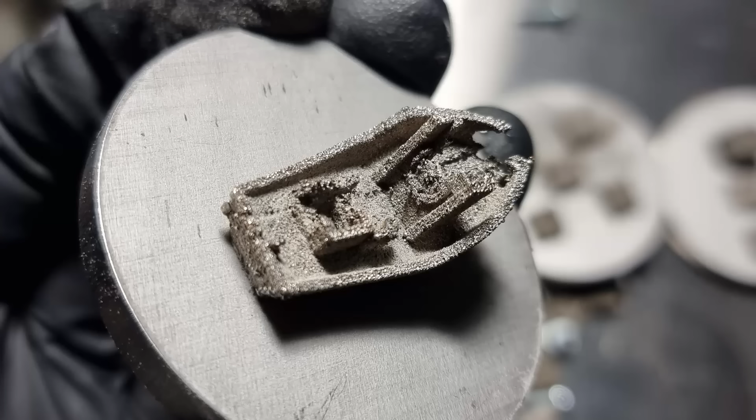The final thing I wanted to print before calling it a day was a benchy. The print volume is very limited, as this is very much a proof of concept, but it could still handle a benchy at 50% scale. It would take 5 attempts before succeeding, with the first failing due to there still being some undiscovered issues with my controller, leading to a double application of powder, causing a lack of fusion and some areas to just crumble away. The second benchy would fail due to me underestimating how much powder was in the hopper, and the third would fail with me realising the step size was also responsible for the shortage of powder. The fourth benchy would fail at the 11th hour due to the build piston breaking free, and finally, the fifth benchy would allow me to call it done.

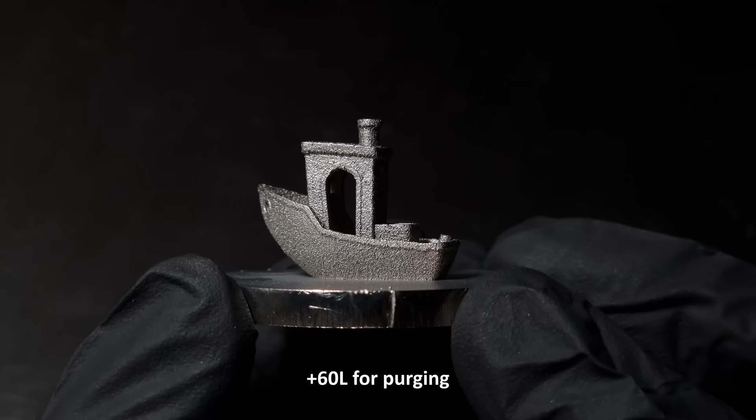The final print took around 2 hours and 12 minutes, consumed 132 litres of argon, and achieved a final density of 78.9%. There's obviously a lot of room for improvement, and I'll be shooting for near full density in my next video, attempting some more unconventional things too. But this unfortunately means this particular powder bed design will be going in for another round, while I focus on other things. I have been working on another design, and it will be quite a significant departure from this build, but all in due course. Anyway, that's where this video concludes.